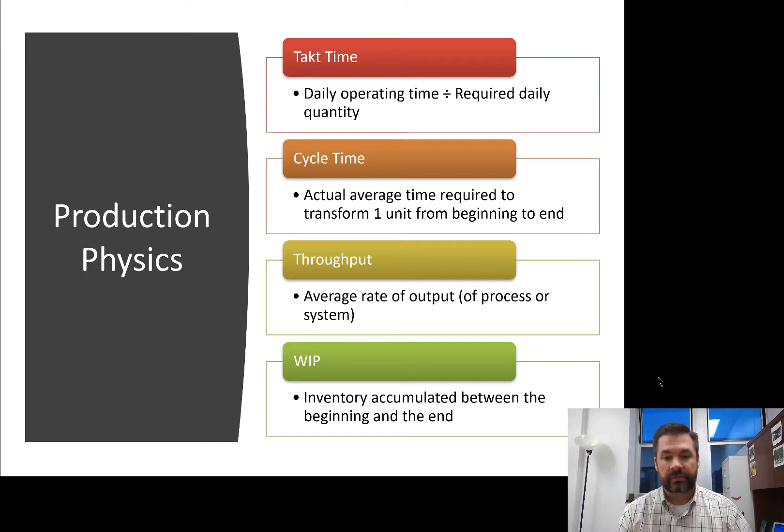WIP in a production environment is some half-completed product in between the beginning and the end, and that's total WIP in between those beginning and end points. So now we can talk about Little's Law. Little's Law is a relationship similar to in physics when we know force is equal to mass times acceleration. It's that fundamental relationship that defines how the rest of the physics math works.

So with Little's Law, we have cycle time and throughput and WIP in this relationship, where cycle time is WIP divided by throughput. And you think about throughput rate, it's the time at which I work through my WIP. That's my cycle time. And my throughput time is WIP divided by how long it takes me to do each item. And so that would be my throughput rate. So that seems to make sense if you think about it mathematically.

A better way to think about it and why we're looking at this is suppose I increase the rate at which I produce throughput. If I increase my throughput rate, that generally increases my work in process or decreases my cycle time, or maybe a little of both. If I increase WIP, that allows for increased throughput. That doesn't mean I do, because my rate won't increase just because I have more WIP, but it allows for increased throughput because there's more things to work on, and it increases cycle time.

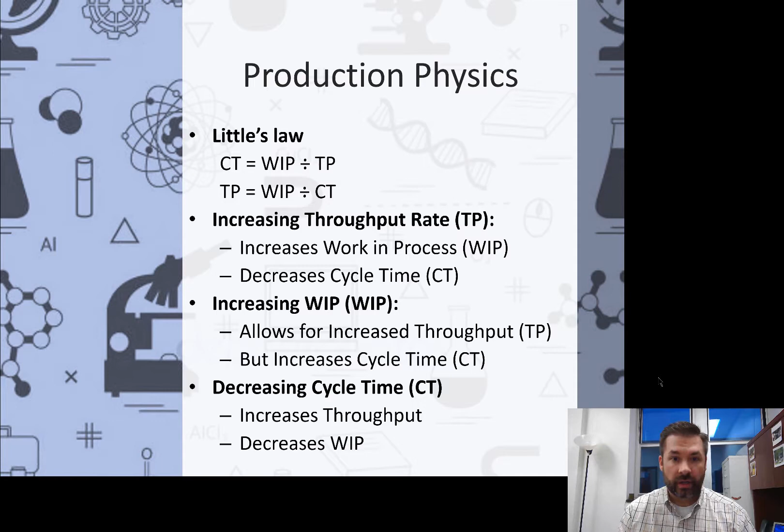The more WIP, the longer it takes in a first in, first out environment for things to get through the system, so my overall cycle time would increase. And lastly, if I can decrease my cycle time, this is the best option. It increases my throughput, so I do things at a faster rate if I'm decreasing my cycle time, and it also decreases WIP. And so in the Lean method, we are really focusing on decreasing the cycle time overall, and that's really what eliminating waste does.

So within those relationships, we have these different laws, which aren't part of Little's Law per se, where the law of variability says that as you increase variability, it inevitably degrades the flow or degrades the performance of a system. And because this is a production law or production physics, we say a production system, but it just as easily relates to services.

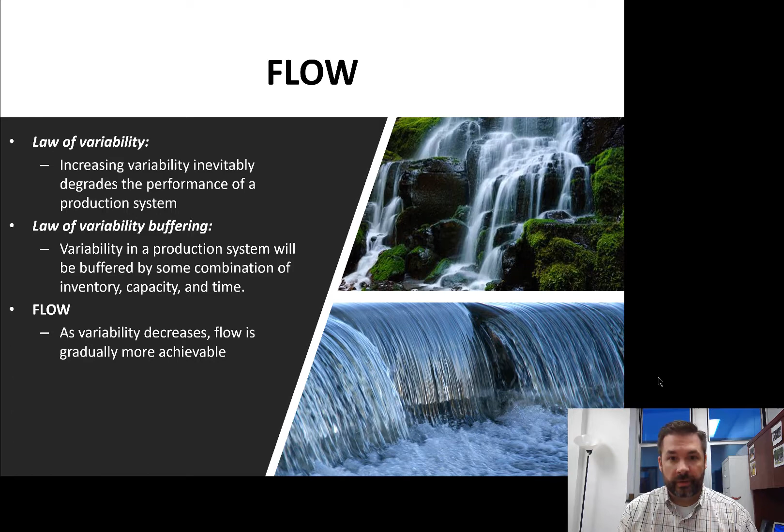And law of variability buffering. Variability in a system will be buffered by something, usually a combination of inventory, capacity, or time. And so if there's variability, there will be buffering naturally, and often those buffers are waste. So the more variability there is in our system, likely the more waste we'll see, because the waste allows us to cover up the mistakes that we're making. And lastly, to achieve flow, we're really talking about decreasing variability in order to make flow more achievable. So there's lots of ways that we can do this in Lean.

We have muda that we want to eliminate. And so muda is an obstacle to our flow. We can think of changeover time as an obstacle. I have to stop what I'm doing, wipe down an operating room, clean everything up, put everything away, bring the next patient in. All of that decreases my flow. That's a changeover in a medical environment.

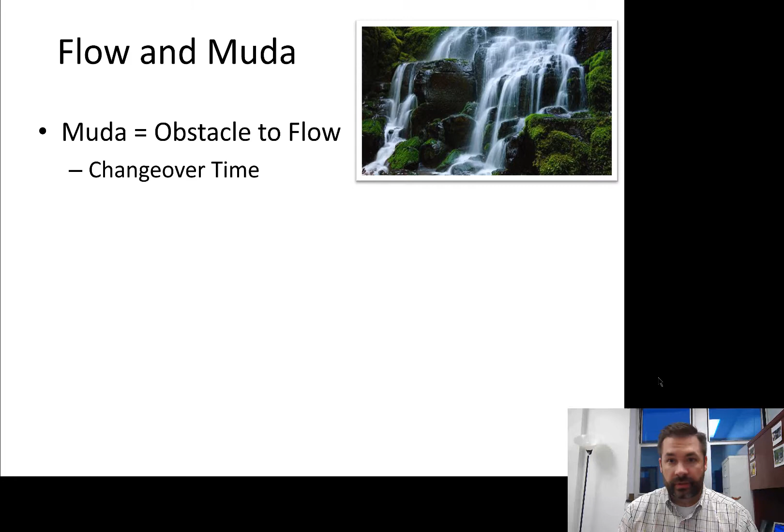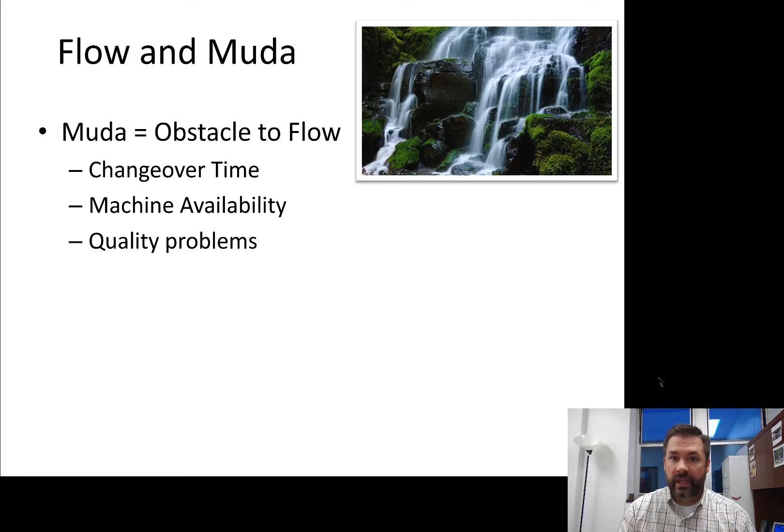Also in a machine environment, if I have to change over parts to produce a new product, that's a changeover as well. Machine availability is an obstacle. If things break down, it stops my production. Also quality problems. Every time I have a quality problem, that's something that doesn't actually accomplish what I set out to accomplish, and it wastes time doing something that doesn't achieve our outcome.

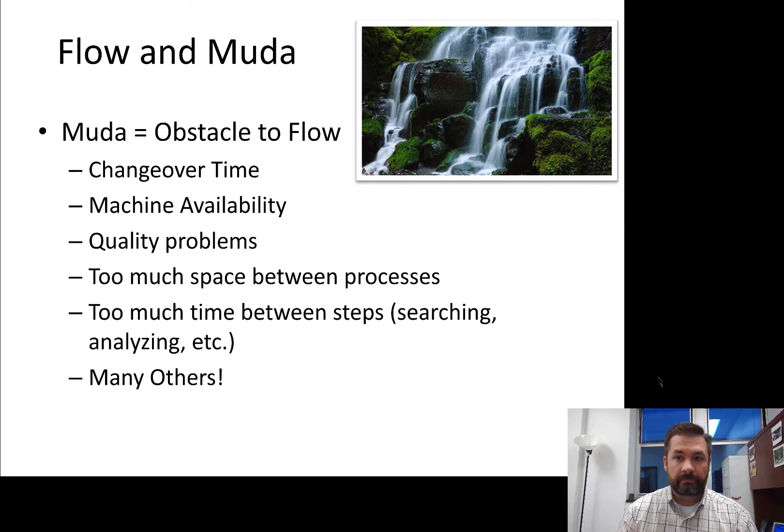And so there's a lot of different things that we can look at as obstacles to flow. Some of the common obstacles are just space between a process or time between steps. And you can see how all these relate to the inability to achieve flow. And so a good way to start achieving flow, and some of these things we've discussed already, first would be to define the value from the point of view of the customer. And we did that early on. Also, a simple approach is to move machinery and people closer so the value can be provided continuously. And then subordinate everything to numbers 1 and 2.

Now, if we were in class, we were going to do an exercise, and I apologize that the snow came. I should have worked out the weather situation, stopped the snow somehow.

But I was going to have us look at that example in the book about the shoulder problem that the woman was having. And how would you redesign the healthcare system to achieve flow? So throw everything you know about healthcare out the window. How would you change your experience in a healthcare environment to make sure everything flowed from one step to the next? What would be required, technology-wise, infrastructure-wise?

Last time I did this in class, it was a really nice discussion about what are the limitations and what are the opportunities to achieve flow in a medical environment. And the students, MBA students, were able to actually redesign some ideal, albeit nearly impossible to accomplish right now, ways to deliver healthcare. And I think it's fascinating when you start throwing things out the window and saying, what would we do if it was a perfect world? And there could be a lot of opportunities that we're not aware of as we brainstorm and innovate.

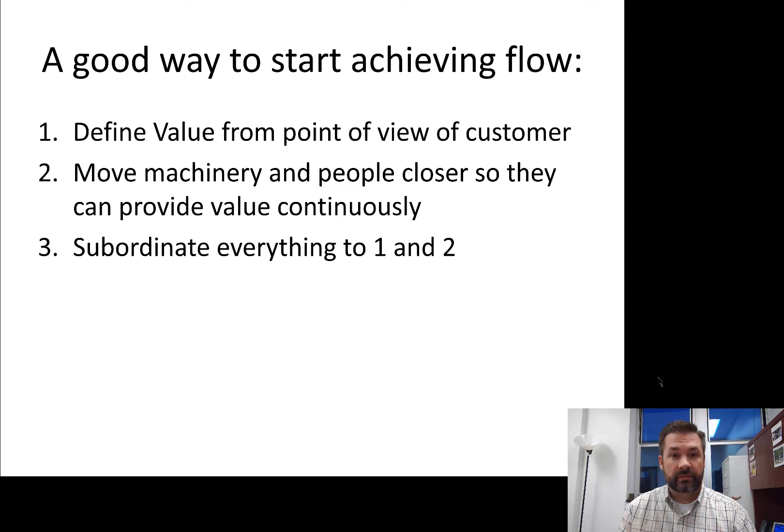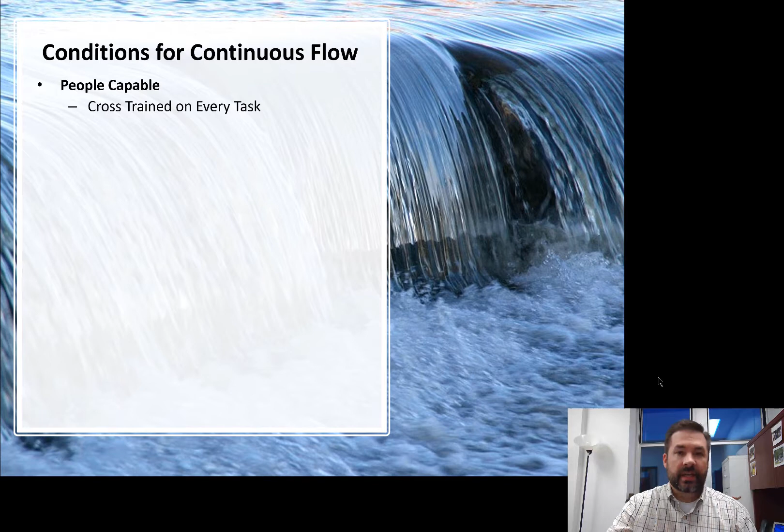So, conditions for continuous flow. First condition, everyone has to be able to do everything. We have to be able to be flexible. So if there's ever a hiccup, someone can jump in and help. So people should be cross-trained. In some cases, this is impossible, especially in a service environment where sometimes the skills are very difficult to come by. Machines must be operational. So they need to be fixed, they need to be maintained, they need to be ready to go. Think of a changeover. It needs to be set to go as soon as possible.

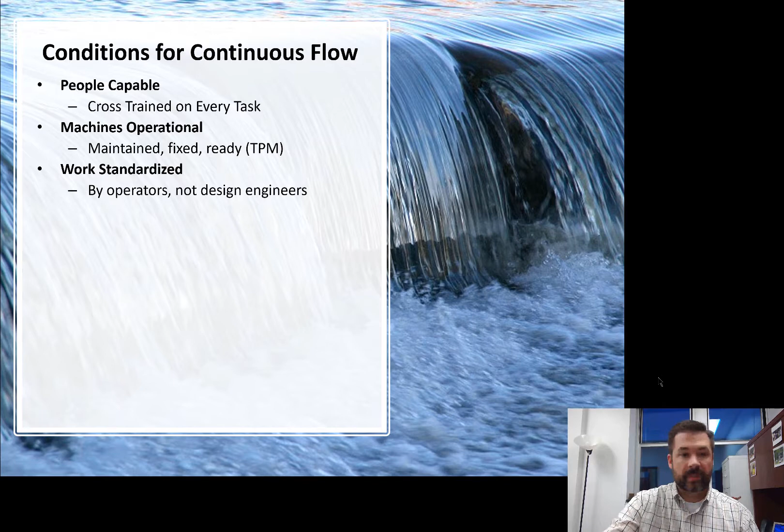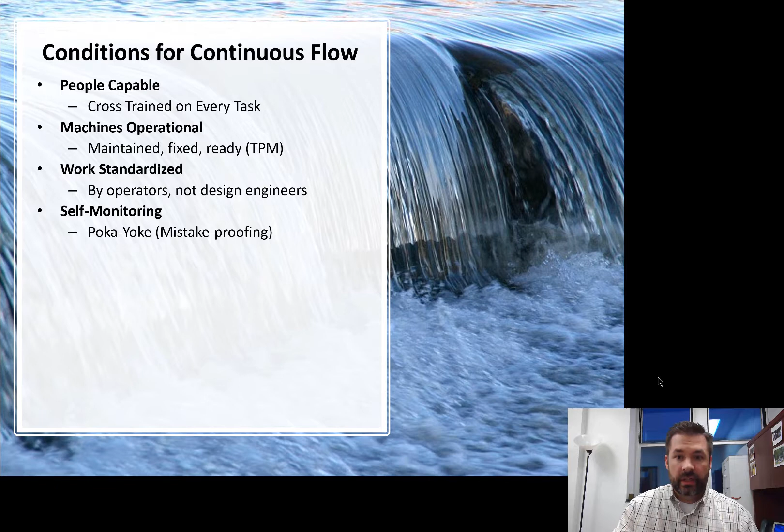Work should be standardized, and it should be standardized by the people doing the work so that they know how best to accomplish it, and it's done in the way that they would normally do it. Self-monitoring is one of those conditions related to quality. I want to be able to have it be fully contained so I don't have to stop and inspect something. The process itself monitors and stops problems from occurring. Visual controls are helpful. They help to establish continuous flow, such as 5S, andon boards, performance feedback, things like that allow me to know how to adjust to make sure flow is occurring.

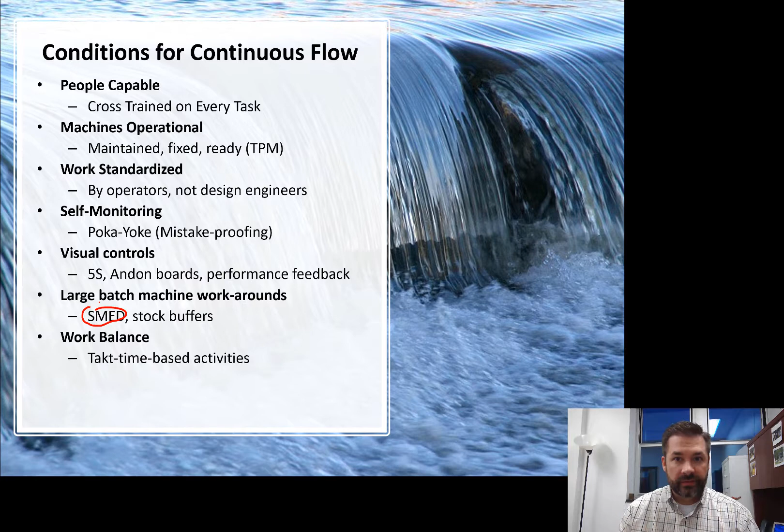Large batch machine workarounds. I mentioned the changeover process. That's basically what SMED is. That's really changeover. Stock buffers is another one. The book mentions Taiichi Ohno doesn't like inventory, but knows that it's important and required in some cases. And so if we have a large batch machine, we've got to have stock in front of it to make sure that it never stops because of lack of inventory. Work balance, we mentioned takt time. If we can balance our work based on takt time, the flow is achieved much more smoothly. And so we almost rebalance or redesign work so that it falls under the approved takt time each step.

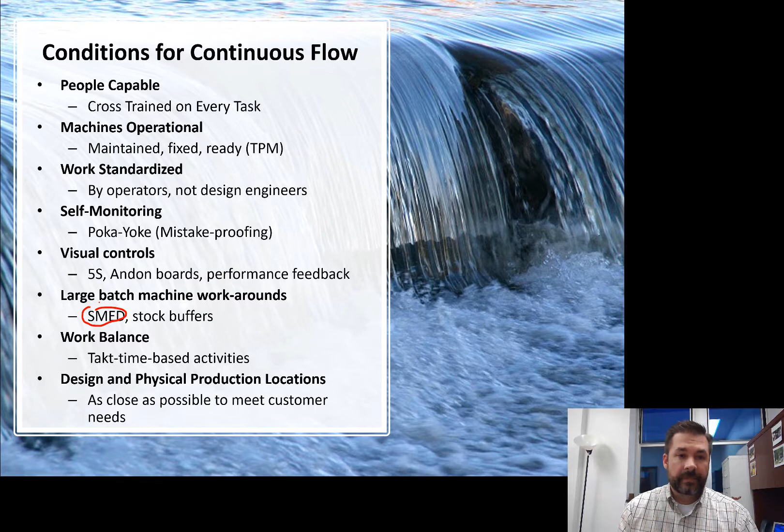Lastly, the most obvious one is move things around so they're closer. And that makes us flow things faster because we don't have to walk so long or transport things so far. So these are just some conditions. And when we look at this list, there's a lot of problems, a lot of things that need to be adjusted. And that's why also this week we're talking about problem solving and the A3 process, which I'll cover in the next video.